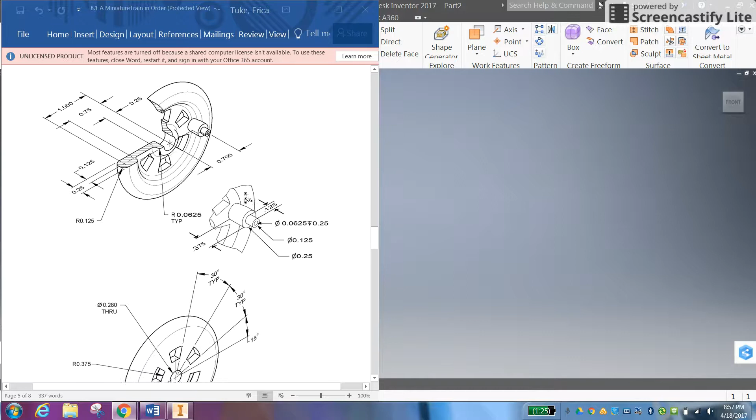In this tutorial, I'm going to show you how to make the wheel in Inventor for the train car project. This is part one of a two-part tutorial. We're going to start off by making the actual wheel shape, and then in part two I'll show you how to make the extrusion that holds the linkage arm, and then the cutouts for the circular pattern on the wheel.

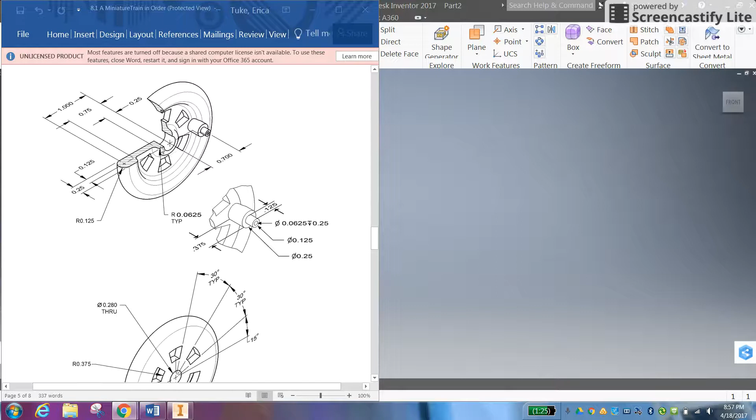The first thing we notice about making this wheel is that we are working with a section view, and the section view can be revolved around a center axis. It's really important to pay attention to the center mark on the wheel because every dimension goes to that. One major mistake people make is dimensioning everything to the bottom line of the section view instead of to the center point.

So let me do a side-by-side here. We're going to start a new 2D sketch on the XY plane, so we have our front view orientation. The first thing I'm going to do is create a construction line from the origin. I click on Format, hover over my construction line icon, go to my Create tab, and create a line. Let's make sure that's straight. There we go, and now all of my dimensions are going to go here.

The first thing I'm going to do is sketch out this basic shape. I'm not going to add in any dimensions yet. These little curved corners are fillets, details we can add in later. For now, we're just going to make them a little boxy. Before I go any further, let's make sure these are not construction lines, so let's turn that feature off. All right, much better. So we have a little curved piece up here, which I'm going to ignore for now.

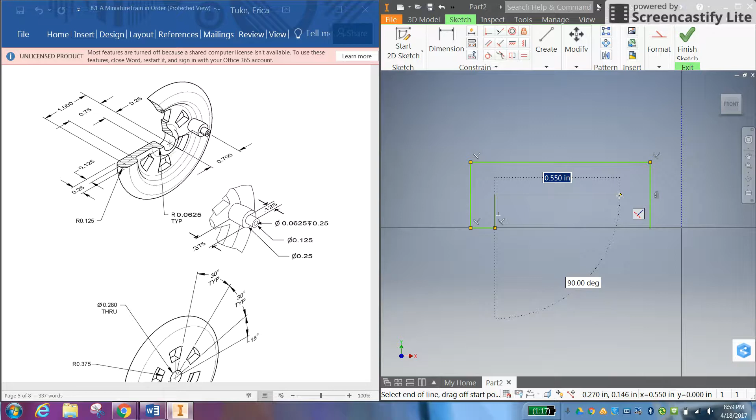And I can go back in here, make a circle, and let's just go ahead and drag that out. And I can trim in my modify panel what I don't need. And that's how we get that basic shape.

So now let's go ahead and start adding in my dimensions. I know that from the center point of this circle to the center of my wheel is 1 inch. So I'll get a dimension, center point to rotation axis, that is 1 inch. From this next level to the center line is 0.75 inches. And from here, this next little level to the center line is 0.25 inches. So that's a good place to start.

Now we're not quite done dimensioning this area, we still have a couple more dimensions to look at. The first thing I want to point out is the radius of this arc. Arcs in Inventor are dimensioned using the radius, but circles are dimensioned using the diameter. So if I go to dimension and click on this, it's giving me a leader line, asking for the radius dimension. Let's type in 0.125, press enter, and notice the entire shape gets a little bit smaller. That's what we want.

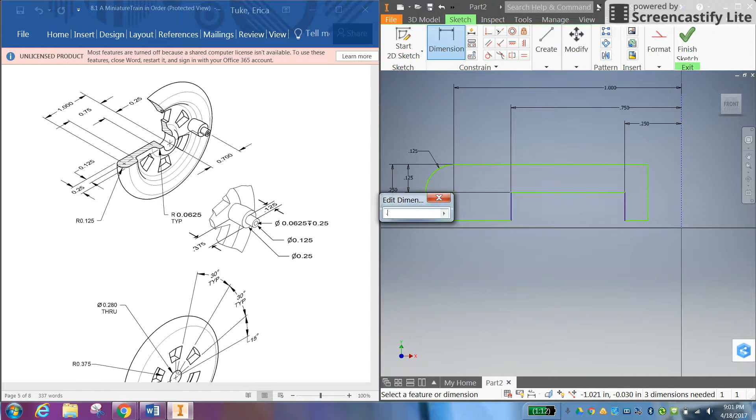This 0.25 is the distance, or the diameter of the circle, so notice it's double the radius. That means from the top here to the bottom should be 0.25, as you can see. Press enter, that amends it. Finally, we want to make sure this piece here is perfectly centered on the part, so it's asking us to dimension that to 0.125 inches. Go to this bottom piece, to the top of our part, drag this out, type in 0.125. It was already there because this line is locked into place at the center of my circle.

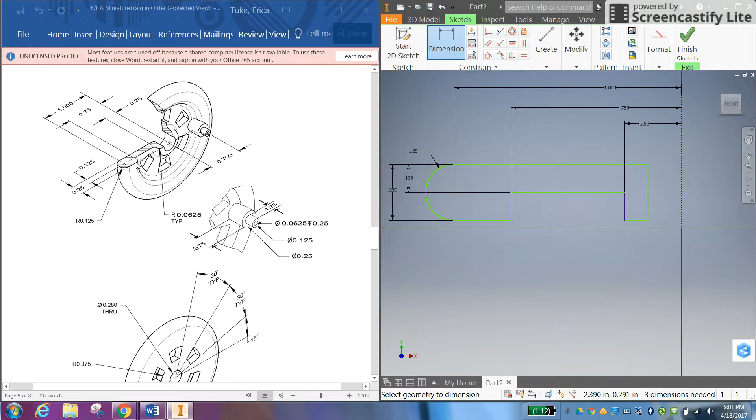So from here I've covered all of these dimensions. Now I can start looking at my radius. My radius for my fillets is R 0.0625 TYP. TYP means typical, which means it can be assumed for my 1, 2, 3, 4 fillets.

Let's go ahead and go to my fillet tool right here. I have to type in my 0.0625 inches first, and notice if you just hover over the location where you need your fillet, it will create it for you and give you a preview. So just click there, there. Let's try this again. Here, and here. And that's looking pretty good.

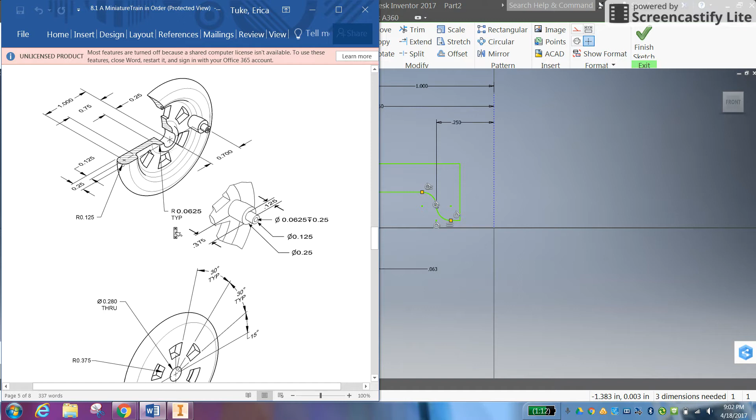Now that I have that done, there's one more dimension we have to look at, and that is the distance from the center of the circle to the edge of my part. This one's a little tricky because it's not shown on this image. You actually have to scroll down and look at the diameter of the circle. This is looking at the back view of the wheel. The diameter of that circle is 0.280 inches, and it goes all the way through the part.

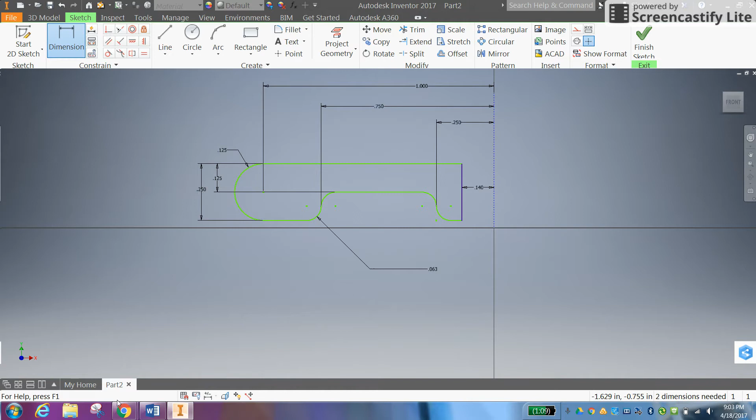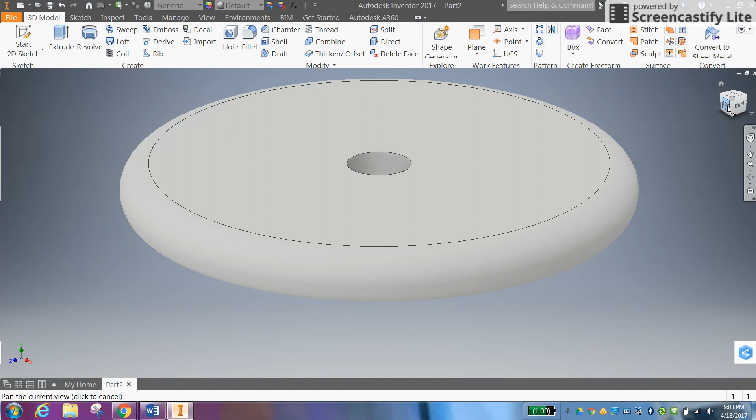So that means from the center line to the edge of my profile, let's get out of my fillet tool, from the center line to the edge of my profile is going to be 0.280 inches divided by 2, or you can just type in 0.14, it's up to you. Now that we have that set up, we're going to right click, finish our 2D sketch, and go over to revolve. It automatically selects my profile, so I just need to select my rotation axis, which is my construction line. Say OK for the check mark, and here is your wheel.

Now for part 2, I'm going to show you how to make the circular pattern on the back and how to make this little extrusion coming off over here. But for now, go ahead and save your work and tune into the next tutorial.